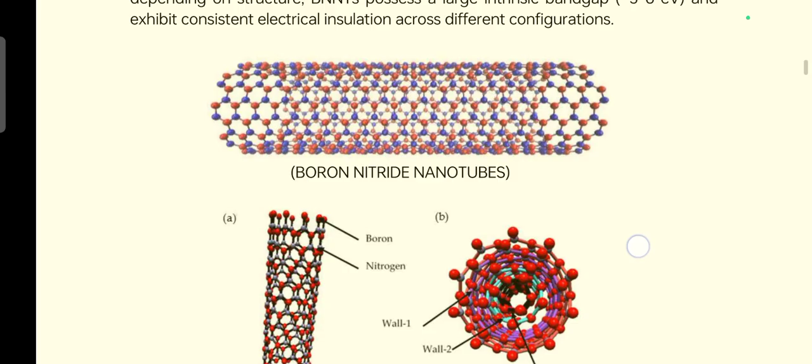Here are some diagrams of boron nitride nanotubes that are represented. There are multi-layered walls - wall 1, wall 2, and wall 3 - which are also made up of boron and nitride nanotubes.

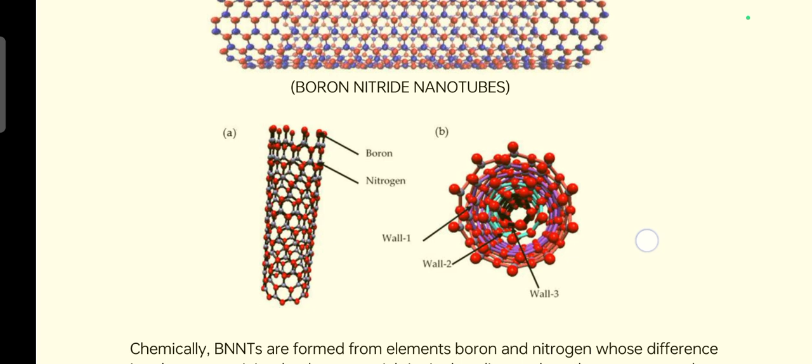Then we will discuss chemically. Boron nitride nanotubes are formed from elements of boron and nitrogen whose difference in electronegativity leads to partial ionic bonding rather than pure covalent networks. Thus we can say that boron nitride nanotubes are chemically made up of boron and nitrogen elements, while carbon nanotubes are made up of only carbon atoms, and in this they have an electronegativity difference that leads to partial ionic bonding rather than pure covalent bond networks.

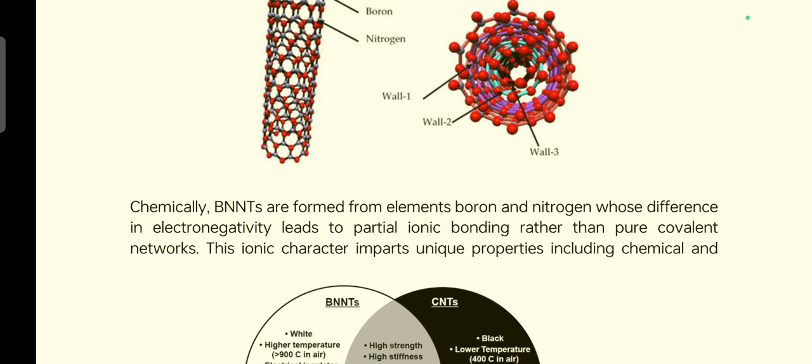This ionic character imparts unique properties including chemical and thermal stability, high mechanical strength, and electrical insulation. Here is the difference between boron nitride nanotubes and carbon nanotubes.

Carbon nanotubes are black and lower in temperature tolerance, around 400 degrees Celsius in air, and are metallic or semiconducting, while boron nitride nanotubes are white and have higher temperature tolerance. This is because they have ionic character, and boron transfers its electron to the higher electronegative element nitrogen, while in carbon nanotubes there is a nonpolar covalent bond.

In boron nitride nanotubes, there is electrical insulation, piezoelectric effect, no absorption in the visible spectrum, and high neutron absorption. This is because they have high strength, high stiffness, high thermal conductivity, high aspect ratio, and low density.

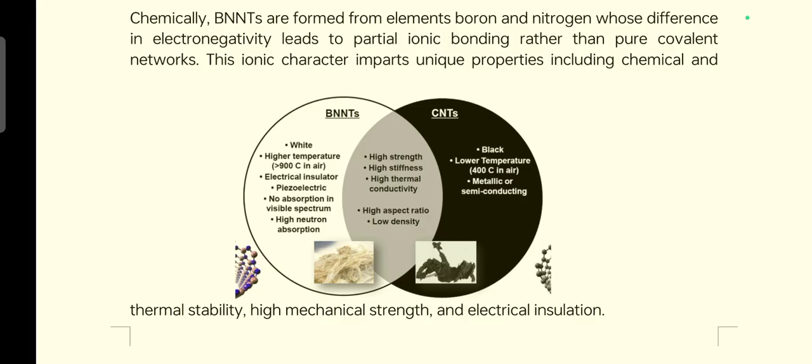Then we will discuss the chemistry and synthesis of boron nitride nanotubes. In terms of chemistry, they originate from hexagonal boron nitride precursors, where layered sheets of boron and nitrogen atoms roll into hollow cylindrical nanotubes under high temperature and controlled conditions.

Thus we can see that boron nitride nanotubes are made from boron precursors, which are layered into sheets and rolled up by the sheets of boron and nitrogen atoms into hollow cylindrical nanotubes under high temperatures, and we also maintain the conditions under which the nanotubes are made.

The elemental composition and bonding arrangement give them structure, integrity, and chemical resistance, capable of resisting oxidation up to temperatures above 800 degrees Celsius.

Boron nitride nanotubes are synthesized using a variety of methods, each grounded in different scientific principles of chemical reactions and physical formation mechanisms. Common methods include arc discharge, chemical vapor deposition, ball milling followed by high temperature annealing, and laser ablation. Arc discharge and CVD walk a fine balance between thermal energy and reactive gas environments to facilitate the growth of boron nitride nanotubes from boron and nitrogen sources.

CVD means chemical vapor deposition. For example, a boron-containing precursor decomposes at elevated temperature in the presence of nitrogen gas, allowing boron-nitrogen bonds to form and curve into nanotubes as they self-assemble.

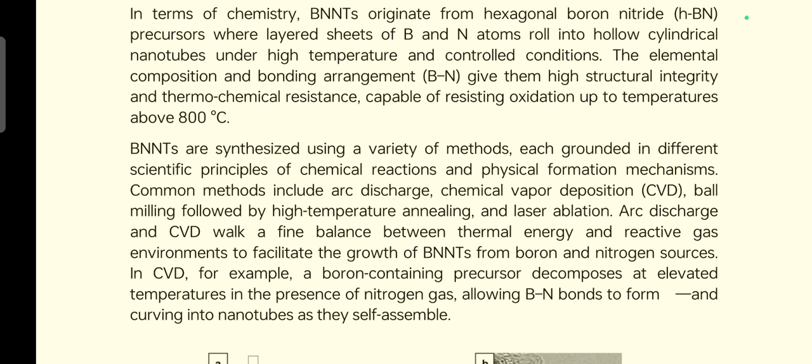We should maintain temperature, and in the gaseous environment the boron precursors then break down and form sheets of boron nitride nanotubes. Here are some diagrams of boron nitride nanotubes.

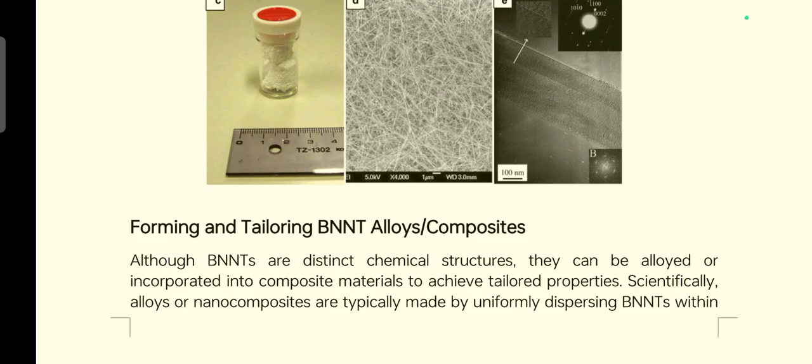Then we will discuss forming and tailoring boron nitride nanotube alloys and composites. Everything that is synthesized has its own properties, but when we make alloys, it will enhance its characteristics more and more, and we will attain better material properties to enhance mechanical strength, stiffness, and other properties.

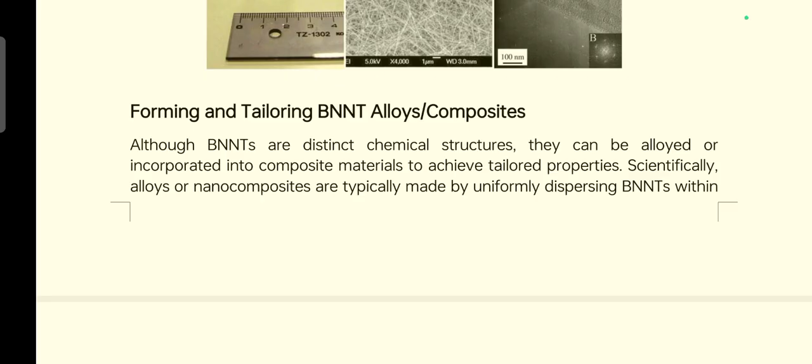Here we will also discuss the forming and tailoring of boron nitride nanotube alloys and composites. Although boron nitride nanotubes are distinct chemical structures, they can also be alloyed or incorporated into composite materials to achieve tailored properties. Scientifically, alloys or nanocomposites are typically made by uniformly dispersing boron nitride nanotubes within metal or polymer matrices and sintering them under controlled heat and pressure.

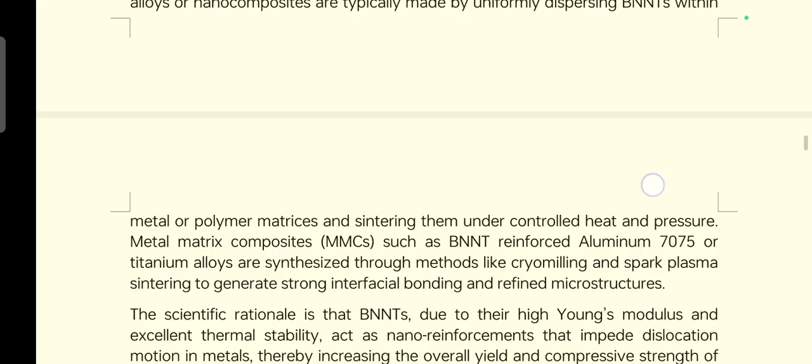Metal matrix composites such as boron nitride nanotube-reinforced aluminum 7075 or titanium alloys are synthesized through methods like cryomilling and spark plasma sintering to generate strong interfacial bonding and a refined microstructure.

The scientific rationale is that boron nitride nanotubes, due to their high Young's modulus and excellent thermal stability, act as nano reinforcements that impede dislocation motion in metals, thereby increasing the overall yield and compressive strength of the composite. This tailoring process allows engineers to optimize mechanical properties such as stiffness, toughness, and high temperature performance, attributes critical in aerospace and structural applications.

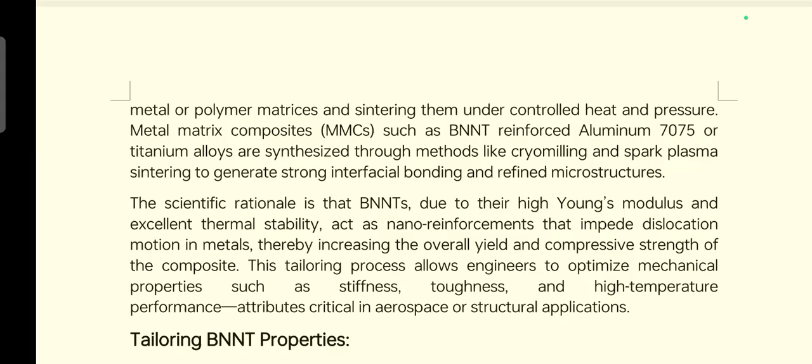Now we will discuss tailoring boron nitride nanotube properties. Once a boron nitride nanotube alloy or composite is formed, intrinsic properties like thermal conductivity, mechanical reinforcement, and electrical characteristics can also be manipulated.

This is done through doping or functionalization. Doping refers to introducing foreign atoms or molecules to boron nitride nanotubes to modify their properties, such as making them responsive to fields or changing optical emission behavior. Boron nitride nanotubes can also be functionalized to enhance interfacial interactions with matrix materials or tune their surface chemistry for specific applications.

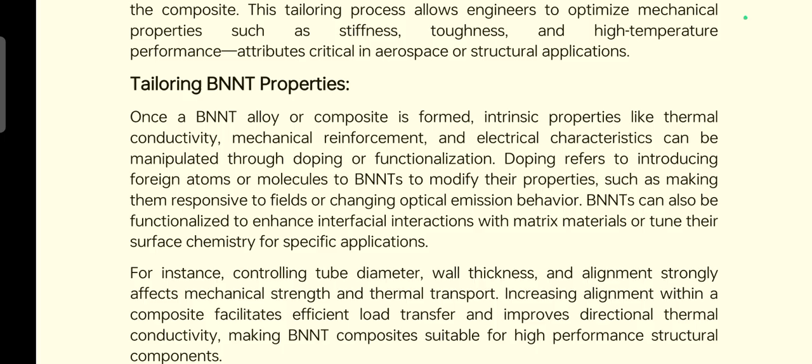For instance, controlling tube diameter, wall thickness, and alignment strongly affects mechanical strength and thermal transport. Increasing alignment within a composite facilitates efficient load transfer and improves directional thermal conductivity, making boron nitride nanotube composites suitable for high performance structural components.

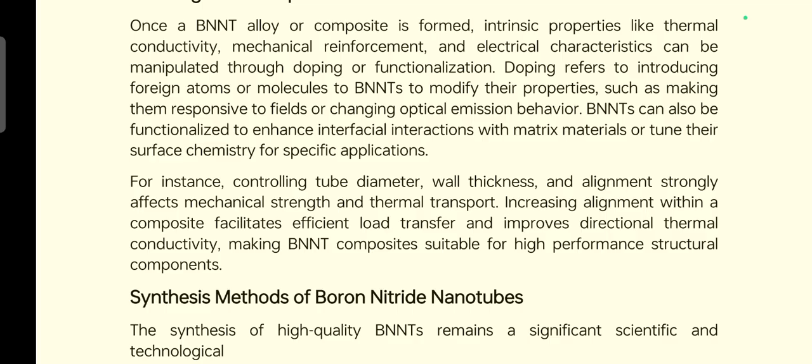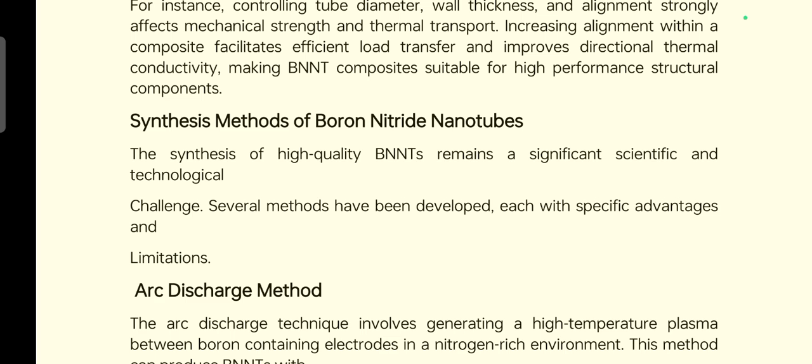Next we will discuss synthesis methods of boron nitride nanotubes. There are several synthesis methods. The synthesis of high quality boron nitride nanotubes remains a significant scientific and technological challenge. Several methods have been developed, each with specific advantages and limitations.

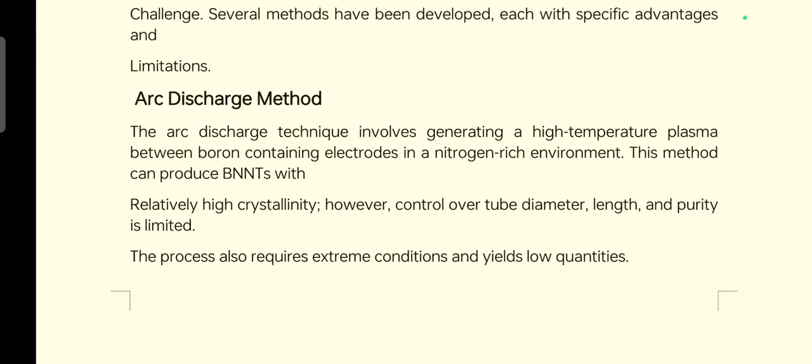First, the arc discharge method. The arc discharge technique involves generating a high temperature plasma between boron containing electrodes in a nitrogen rich environment. This method can produce boron nitride nanotubes with relatively high crystallinity. However, control over tube diameter, length, and purity is limited. This process also requires extreme conditions and yields low quantities.

Now the advantages. The main advantage of this process is that it produces highly crystalline boron nitride nanotubes with good structural quality, few defects, and good mechanical strength.

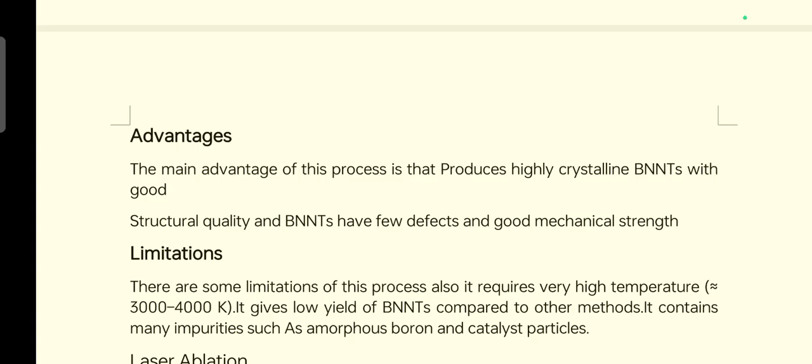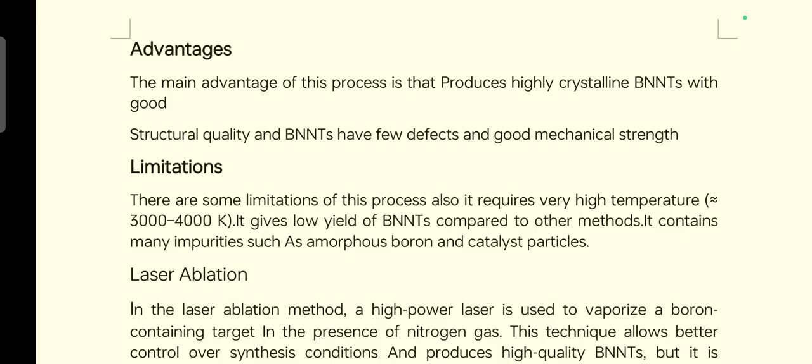Now some limitations, as all processes have advantages as well as disadvantages. It requires very high temperature, 3000 to 4000 Kelvin. It gives low yield of boron nitride nanotubes compared to other methods. It contains many impurities such as amorphous boron and catalyst particles.

Next we will discuss the laser ablation method. In this method, a high powered laser is used to vaporize a boron containing target in the presence of nitrogen gas. This technique allows better control over synthesis conditions and produces high quality boron nitride nanotubes, but it is expensive and not suitable for large scale production.

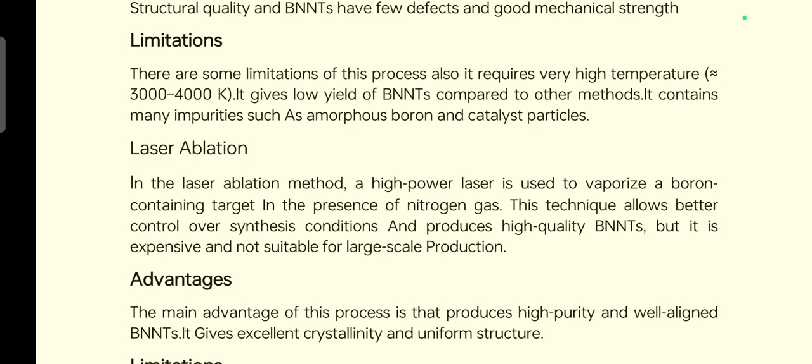Now the advantages, as all processes have some advantages as well as some disadvantages. The main advantage of this process is that it produces high purity and well aligned boron nitride nanotubes with excellent crystallinity and uniform structure.

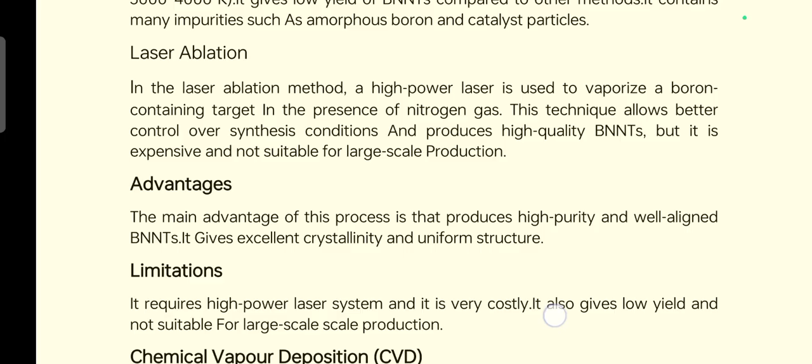Now some limitations. It requires a high power laser system and is very costly. It also gives low yield.

It gives excellent crystallinity and uniform structure. Now we discuss limitations of this method: it requires a high power laser system and is very costly, and it also gives low yield and is not suitable for large scale production. We can say it can be applicable at laboratory level, but not at industrial level.

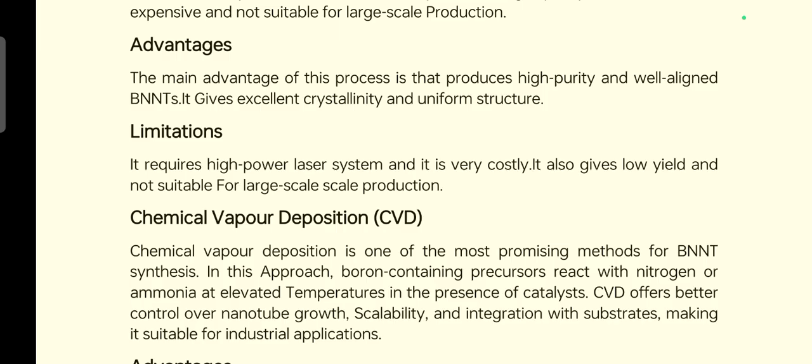We will also discuss another method, chemical vapor deposition. CVD is one of the most promising methods for boron nitride nanotube synthesis. In this approach, boron containing precursors react with nitrogen or ammonia at elevated temperature in the presence of a catalyst. Since a catalyst is also present in this system, CVD offers better control over nanotube growth, scalability, and integration with substrates, making it suitable for industrial applications.

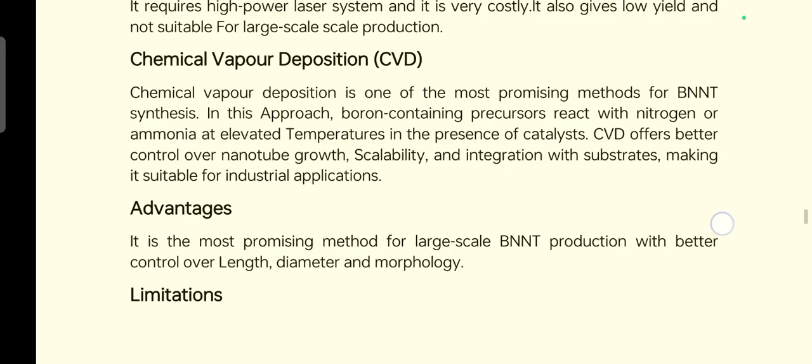Here are some advantages of this process. It is the most promising method for large scale boron nitride nanotube production, with better control over length, diameter, and morphology. Thus we can say this method is applicable for large scale production.

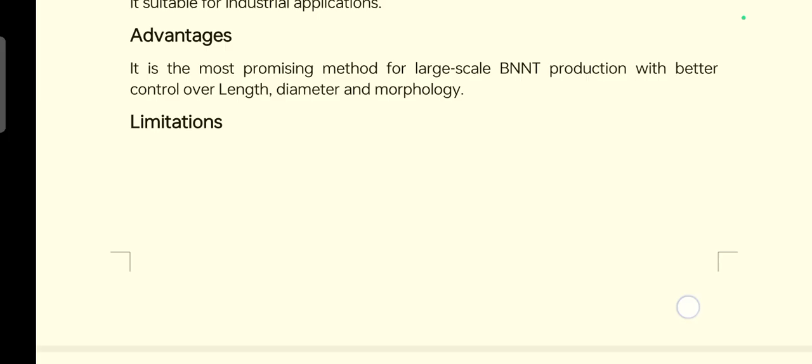There are also some limitations of this process. Boron nitride nanotubes may contain structural defects, and the use of catalyst may introduce metal impurities.

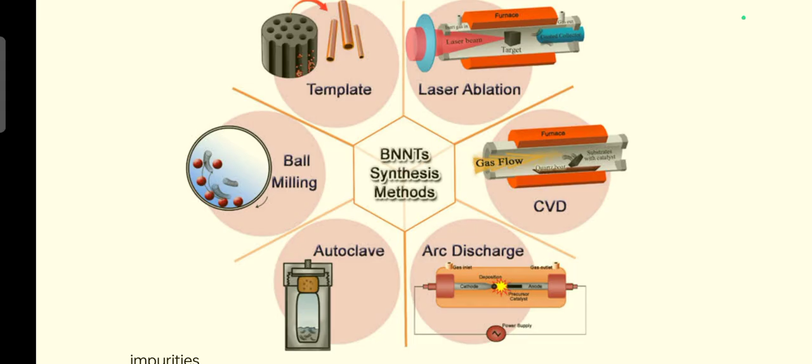So we can see these images show different methods: laser ablation, chemical vapor deposition, arc discharge, as already discussed above, template, ball milling, and autoclave method for the synthesis of boron nitride nanotubes.

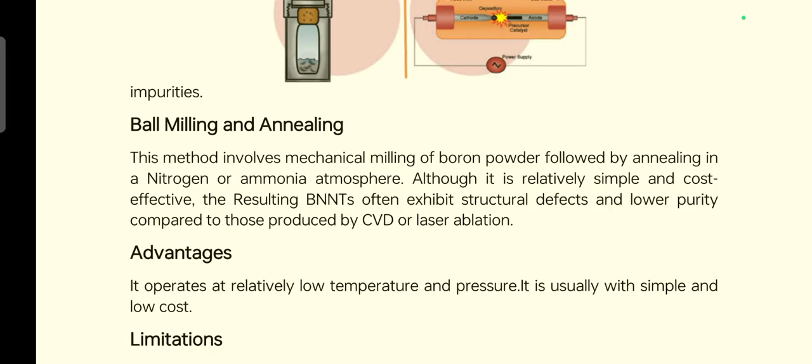The resulting boron nitride nanotubes often exhibit structural defects and low purity compared to those produced by CVD or laser ablation. Then we will discuss the advantages of this process.

It operates at relatively low temperature and pressure, and is usually simple and low cost. Here are also some limitations: it produces boron nitride nanotubes with lower crystallinity, and it is mostly useful for laboratory scale.

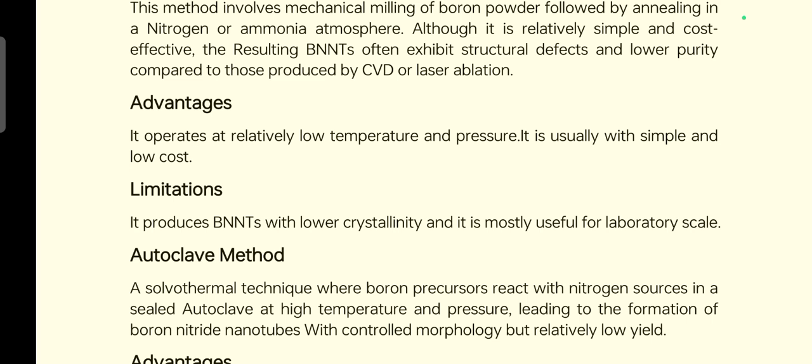Autoclave method is a solvothermal technique where boron precursors react with nitrogen sources in a sealed autoclave at high temperature and pressure, leading to the formation of boron nitride nanotubes with controlled morphology but relatively low yield. It is also a technique used for the production of boron nitride nanotubes.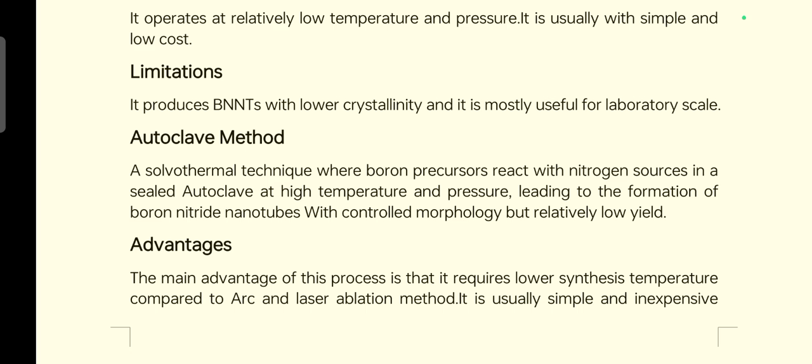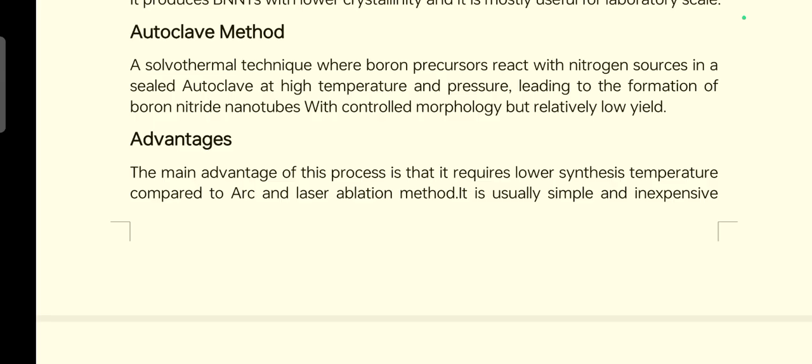As we already discussed the advantages and limitations, we will also discuss them for this process. What are the main advantages? The main advantage is that it requires low synthesis temperature compared to arc and laser ablation methods, and it is usually a simple and inexpensive technique.

Here are also some limitations. It produces boron nitride nanotubes with lower crystallinity, meaning we cannot get higher crystallinity nanotubes in this process. It is also not suitable for large scale or industrial production, and may contain impurities or mixed boron nitride nanotube phases.

As we have discussed all the processes for the formation of boron nitride nanotubes, their advantages as well as limitations, now we will discuss boron nitride nanotubes in semiconductor technology and dielectric use.

From a semiconductor perspective, boron nitride nanotubes are fundamentally different from traditional semiconductor materials like silicon or gallium arsenide. Because they have a wide electronic band gap, they behave as electrical insulators rather than conventional semiconductors. However, this electrical insulation combined with high thermal conductivity and excellent dielectric properties makes them extremely attractive as dielectric materials or insulating layers in electronic devices.

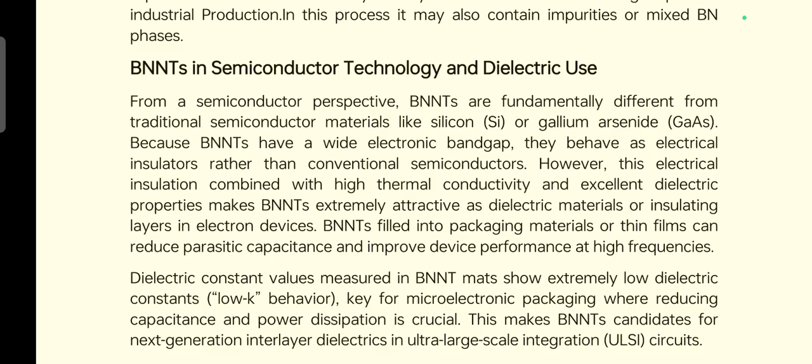Boron nitride nanotubes filled into packaging materials or thin films can reduce parasitic capacitance and improve device performance at high frequencies. Dielectric constant values measured in boron nitride nanotube mats show extremely low dielectric constant, key for microelectronic packaging where reducing capacitance and power dissipation is crucial. This makes boron nitride nanotubes candidates for next generation interlayer dielectrics in ultra large scale integration circuits.

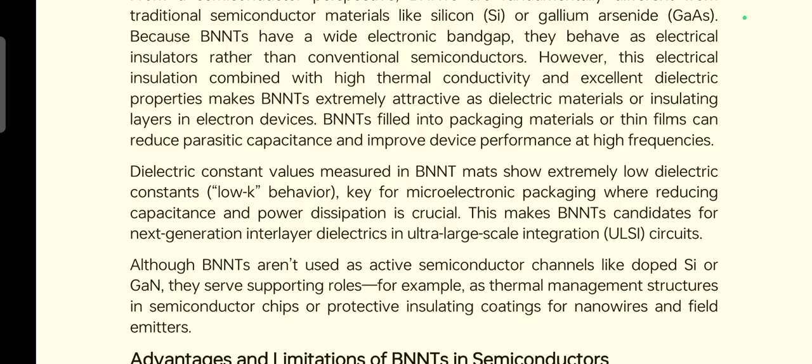Although boron nitride nanotubes are not used as active semiconductor channels like doped silicon or gallium nitride, they serve supporting roles, for example as thermal management structures in semiconductor chips or protective insulating coatings for nanowires and field emitters.

Then we will discuss the advantages and limitations of boron nitride nanotubes in semiconductors. In comparison to traditional semiconductor materials, they provide distinguishing advantages such as superior thermal stability, high thermal conductivity, and high electrical breakdown strength. They also display radiation hardness, making them suitable for space electronics and radiation tolerant systems.

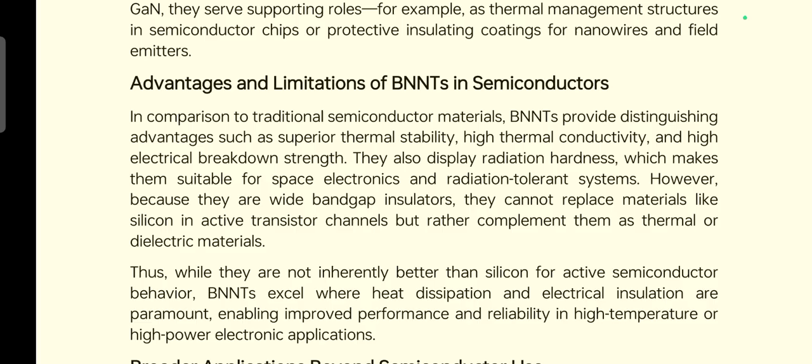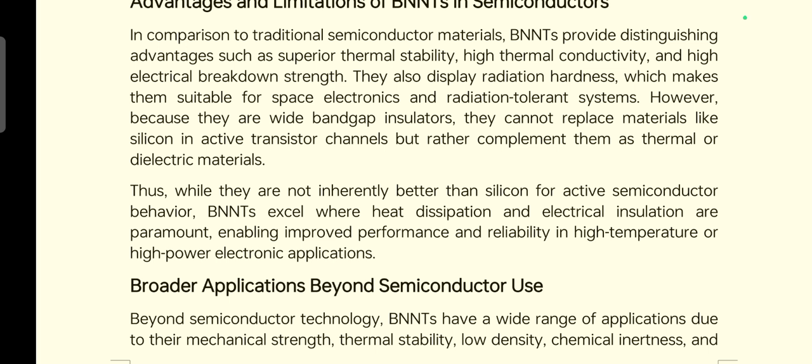However, because they are wide bandgap insulators, they cannot replace materials like silicon in active transistor channels, but rather complement them as thermal or dielectric materials. Thus, while not inherently better than silicon for active semiconductor behavior, boron nitride nanotubes excel where heat dissipation and electrical insulation are paramount, enabling improved performance and reliability in high temperature and high power electronic applications.

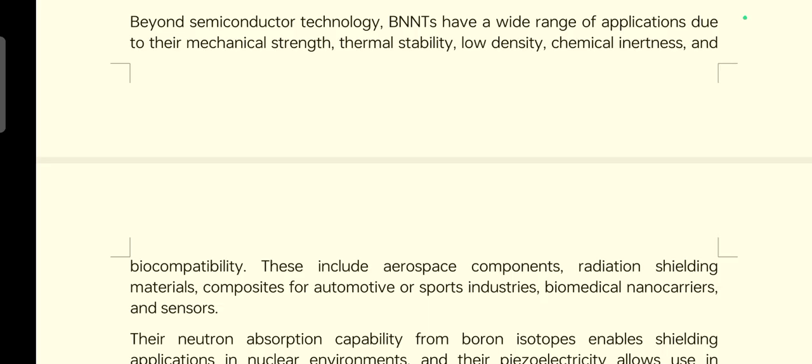Broader applications beyond semiconductor use: boron nitride nanotubes have a wide range of applications due to their mechanical strength, thermal stability, low density, chemical inertness, and biocompatibility. These include aerospace components, radiation shielding materials, composites for automotive or sports industries, biomedical nanocarriers, and sensors. Their neutron absorption capability from boron isotopes enables shielding applications in nuclear environments, and their piezoelectricity allows use in mechanical sensors or energy harvesters.

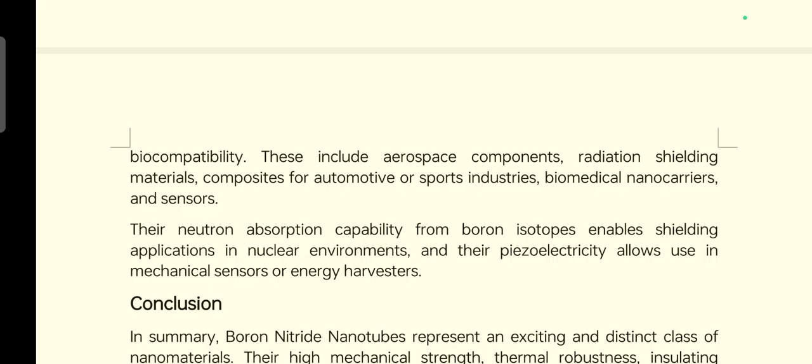Conclusion. Then we will discuss the conclusion of this topic. In summary, boron nitride nanotubes represent an exciting and distinct class of nanomaterials.

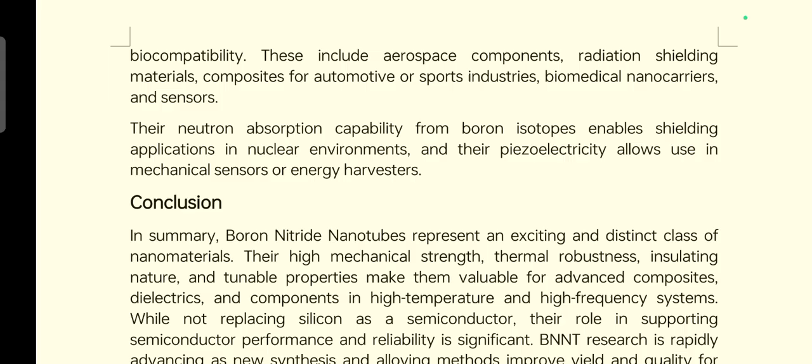Their high mechanical strength, thermal robustness, insulating nature, and tunable properties make them valuable for advanced composites, dielectrics, and components in high temperature and high frequency systems. While not replacing silicon as a semiconductor, their role in supporting semiconductor performance and reliability is significant.

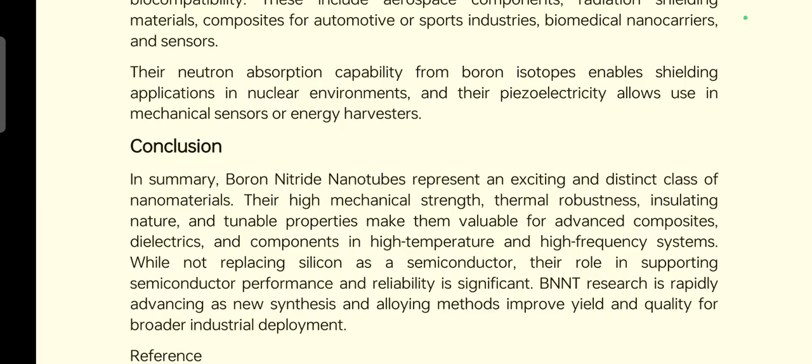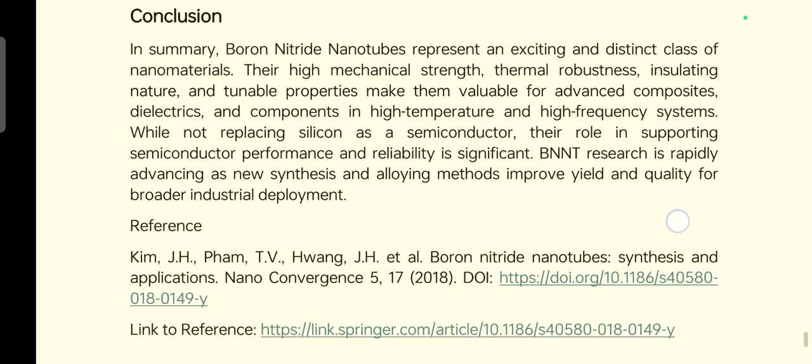Boron nitride nanotube research is rapidly advancing, with new synthesis and alloying methods improving yield and quality for broader industrial deployment. Here are some references from which this source is taken, and this is all about my topic on boron nitride nanotubes.

Thus, we can say that boron nitride nanotubes have high mechanical strength and stiffness, and can be used in advanced technological instruments because of their high strength and stiffness. This is all about boron nitride nanotubes.